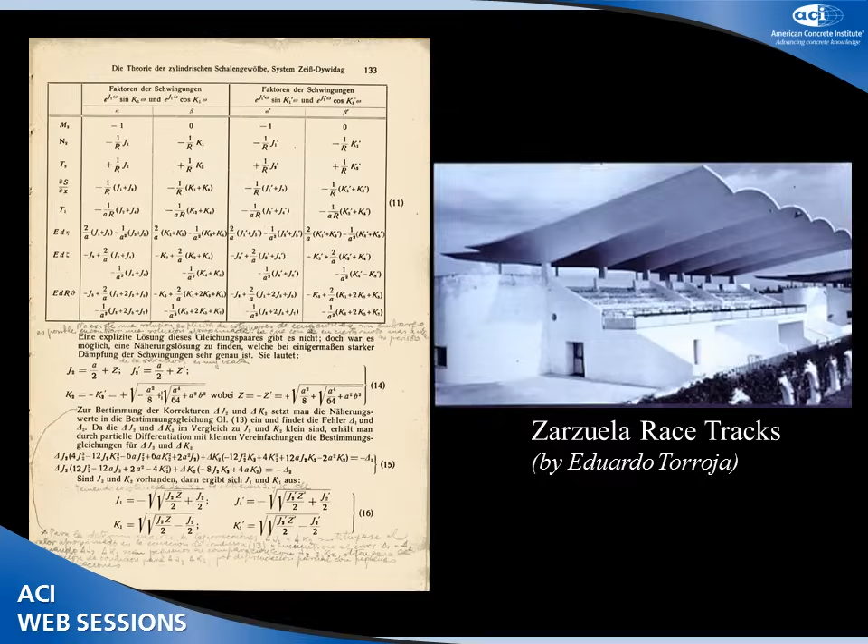Now, after he finished his studies, this is the 1930s in Madrid, the Civil War broke out, and he ended up fighting in the war, went to a concentration camp, and in 1939 he was exiled to Mexico. And it's in Mexico that we see his important works be built. It would be 10 years after arriving in Mexico that he would start experimenting with shells. And he would go back to this passion that he had about shells.

So now he had a little bit of money, he'd purchase the publication. So here we see in Candela's own handwriting in the notes, he's studying again these papers that he had in Spain written by hand. But he's also understanding that to become a shell builder, you can't just stop with knowing the theory. You have to practice it and understand the practical limitations of shell construction. So on the right, in 1949, we see his first shell construction of funicular form. And in 1950, he starts his own company, a company that would be dedicated to the construction of shells.

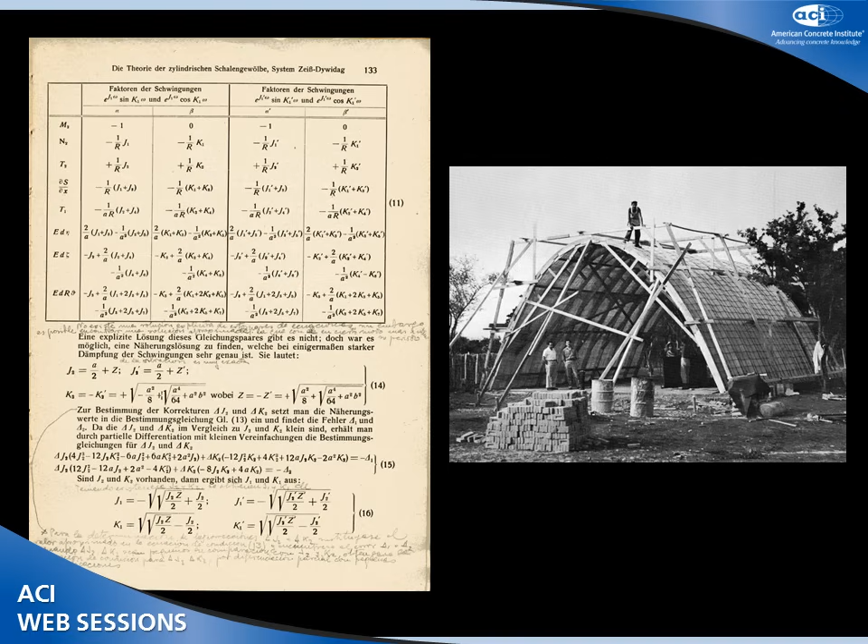Now, at first, he started with traditional shell forms, the single curvature, cylindrical barrel-type structures. But the geometric form that will become synonymous with Candela's name is the hyperbolic paraboloid, abbreviated HYPAR. So for the HYPAR, we have a double curvature surface. Double curvature has a tremendously greater amount of stiffness than single curvature. So we see that the curvature comes in two directions like a saddle, and it can be generated with straight lines in two directions. So this is a huge advantage for construction because no longer did he need to use curved pieces of wood for the formwork of his shells.

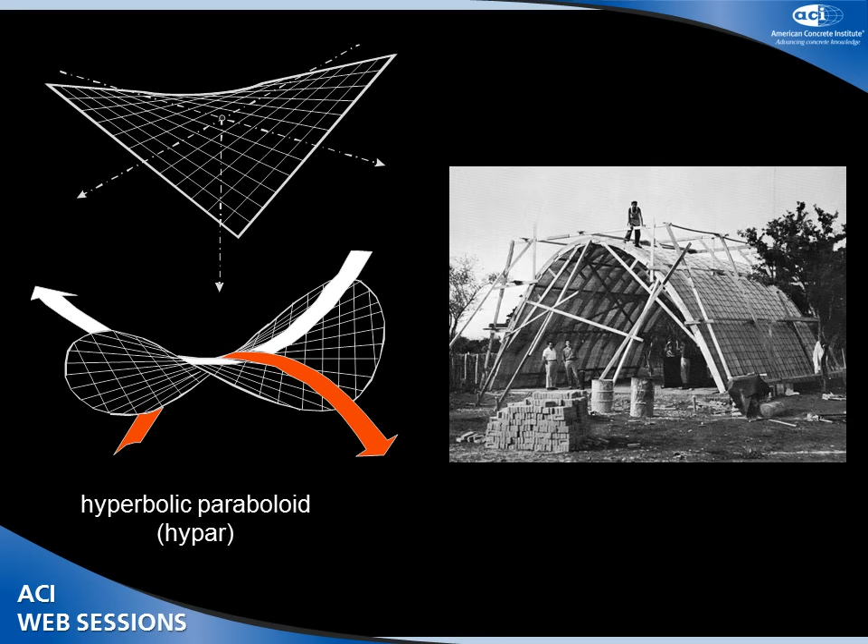His first hyperbolic shell was the Cosmic Rays Laboratory at the University of Mexico City, UNAM. And for this project, the project director invited Candela to be the builder, the contractor. And already there was a project architect involved. And the architect asked Candela to build a single curvature wagon-like structure. And Candela went to the architect and said that he would instead like to build double curvature shells, two saddles back to back. And there were several reasons for this.

One is that the shell at the very top could only be 5/8 of an inch thick, 5/8 because it needed to be able to measure the cosmic rays inside the laboratory. And Candela knew that the shell therefore needed that double curvature for that stiffness. As the shell goes down, it thickens to 1.5 inches. So all of Candela's shells are actually 1.5 inches thick. That's the dimension that Candela used to build his shells, and you can see that extreme thinness on the edge.

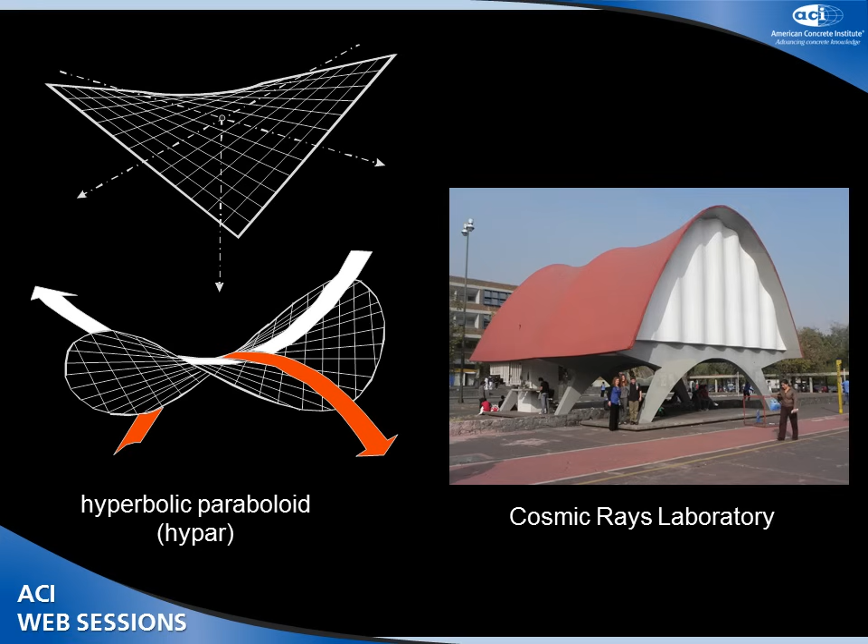He also took the ideas of the architect, modified the supports, again, another kind of aesthetic touch to the design, and also changed the screen. He corrugated the screen because Candela liked the way that the shadows played on that surface. So here's an example, and you'll see many more, of where there's an architect involved. Candela's hired as the builder, but the builder who makes the engineering calculations, he takes a general idea, which typically comes from an architect or somewhere else, and he modifies it to create his own art.

Here we see that shell under construction where indeed we can see the straight lines, the straight wood that's used to generate this double curvature surface. Again, a geometric property of the HYPAR.

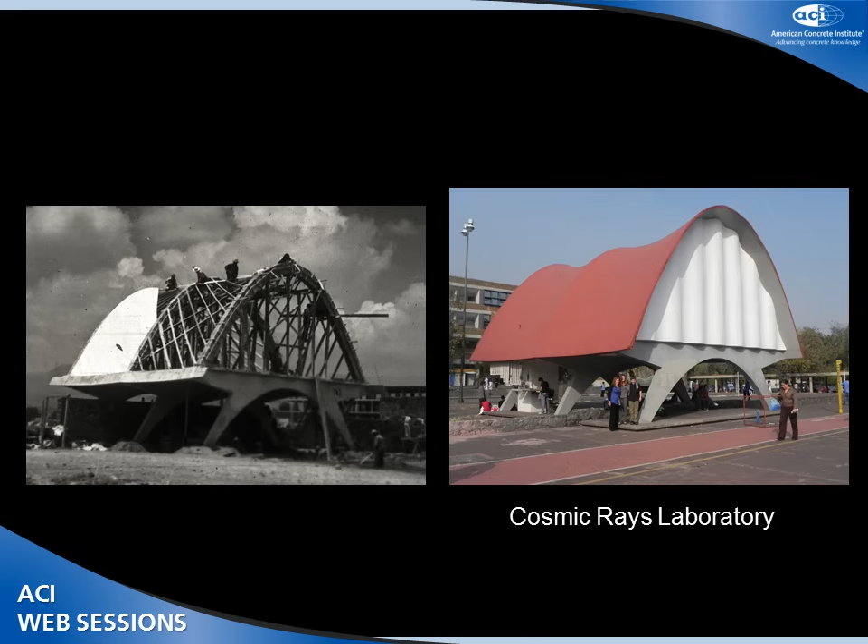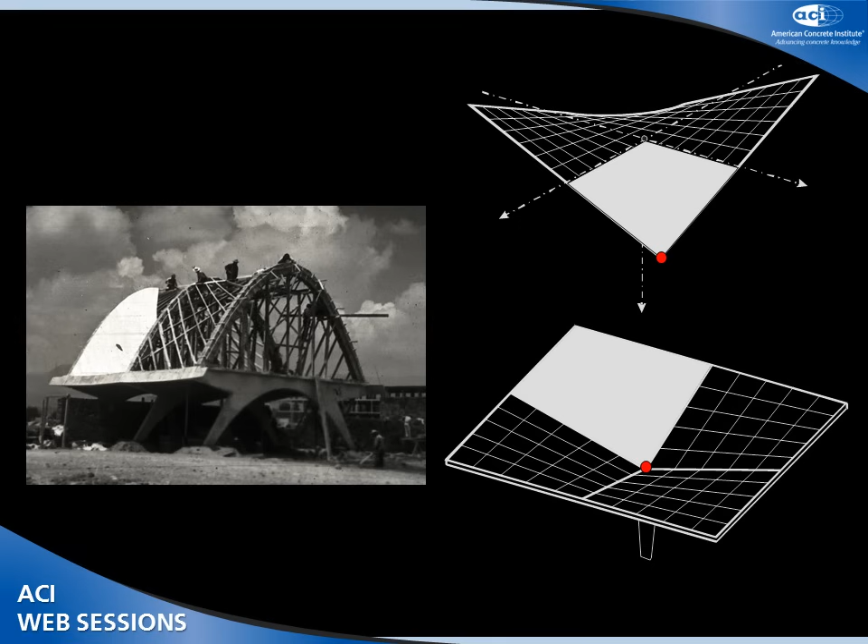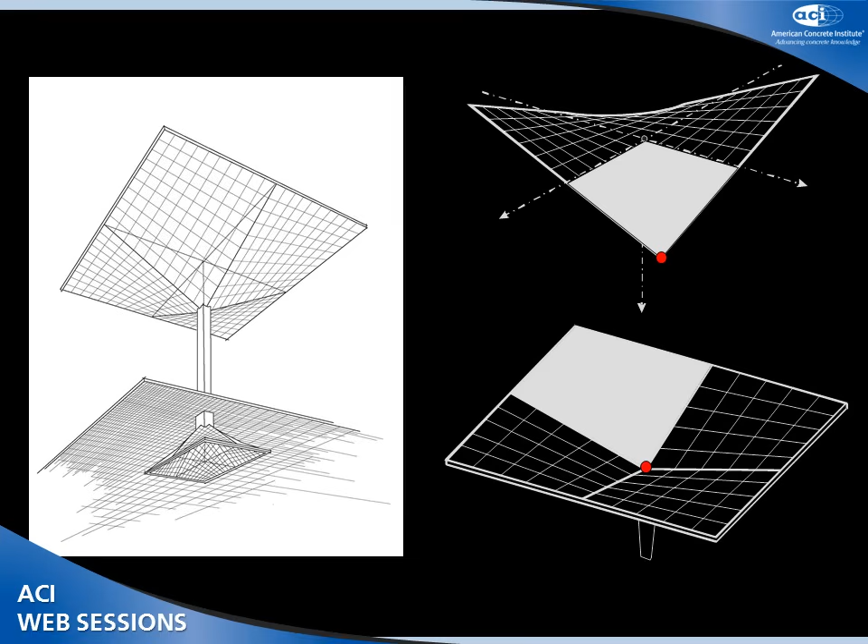Now for his company, what we call the bread and butter structure are the umbrella forms, where we see the HYPAR shell up here. If we take 1/4 of that, you have this red dot here, copy it over 3 more times, we get this inverted umbrella structure. And we saw an example of umbrellas at lunch by Nervi. This is Candela's umbrella. And here's a sketch, a rendering made by Candela where we see that even the foundations below ground are umbrella forms, all HYPAR surfaces. And the idea here again came from somewhere else. So he saw this paper in 1936 written by a Frenchman named Aimond.

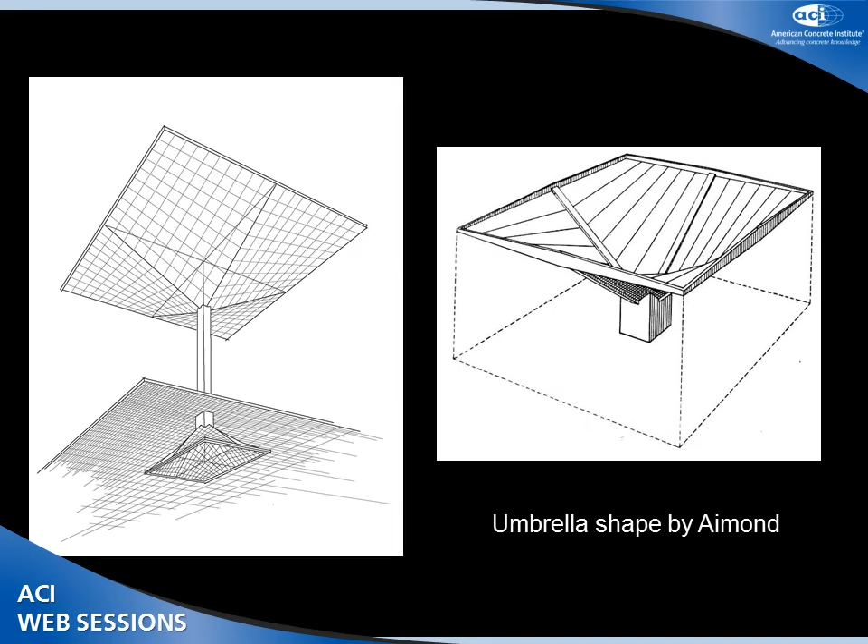So again, the idea where he's taking an idea or a form from somewhere else and making his own art with that form. By placing many of these side to side, you get a large roof covering. So there were many warehouses and markets that were designed in Mexico. If you go to Mexico City, you're almost likely to run into one of these umbrella forms. And by tilting that umbrella, there's a light well in here that allows light to enter this huge covered space.

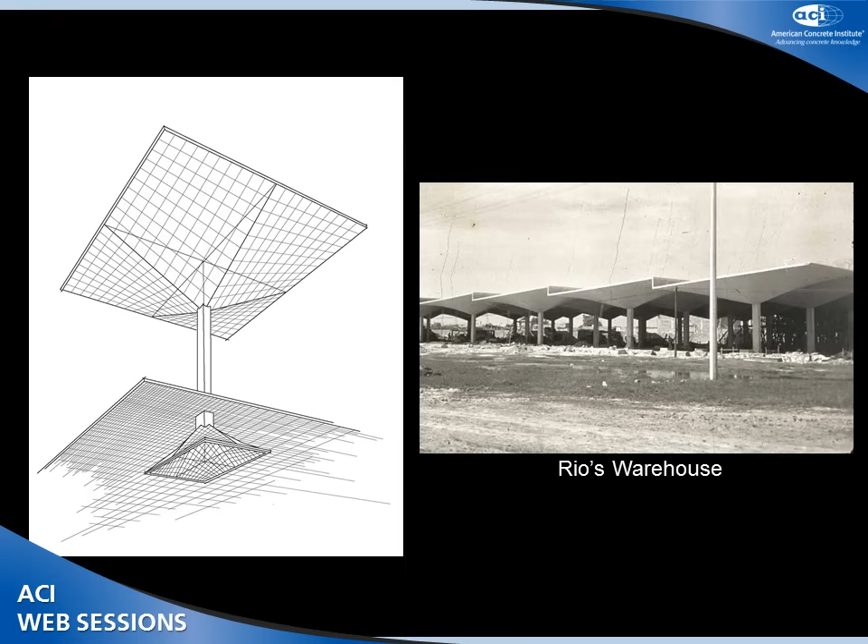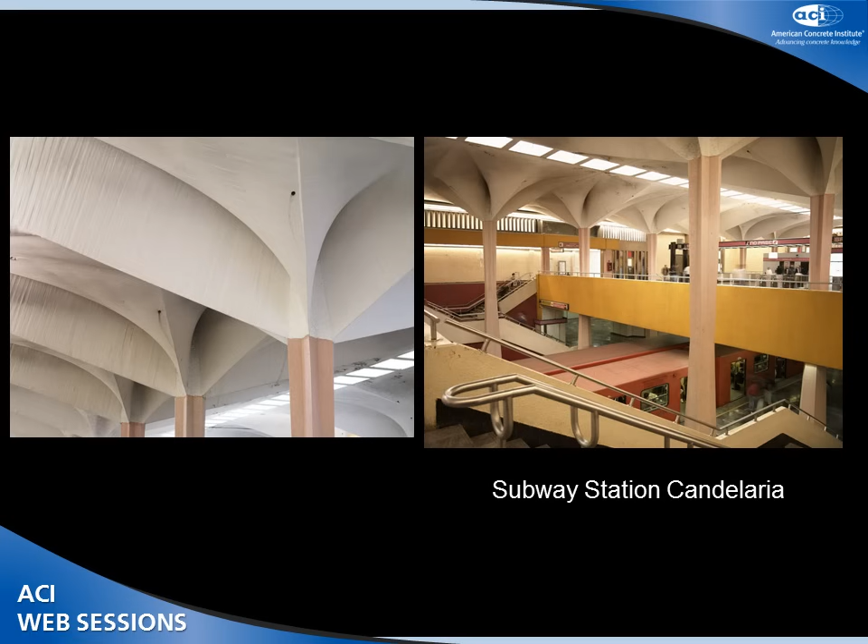This is actually just for a subway station, but you see even for a subway station, he doesn't compromise the elegance of his designs. And here's a closer view where if you look closely, you see the lines here indicating that he's using straight pieces of wood, again, that hypar surface, to form this concrete.

And the biggest play of the umbrella is actually for this church, Our Lady of the Miraculous Medal Church. I call it Milagrosa. Milagrosa means miraculous in Spanish. And if you look at it, and if I didn't tell you, or if you didn't study Candela, I bet you wouldn't see the umbrella form in there.

So the way that Candela explains how the form is derived is you take a symmetric umbrella, shown on the left, and then you tip it so that this surface here is now touching the ground over there. And you take the center point here, lift it, you place another one back to back, and here you see on the right that image of that one bay of that church. So here is a tremendous play of this form, of the umbrella form.

And one thing that we say about these structural artists, Candela and Maillart and Nervi, is that they are disciplined by efficiency and economy, and they play with the elegance. So there's many solutions to an engineering problem, so you just modify and you play with it to achieve that elegance. And that was really his ethos for how he approached his designs.

So this structure here, again, he was hired as the builder. There was an architect that was hired for this design. The architect had in mind a hangar-like structure, just a cylindrical, one single curvature, like an airplane hangar structure. Candela again went to the architect and said, I'd rather not build what you've shown me, I'd rather build this. He had in mind this, and he'd been itching to design something similar to this.

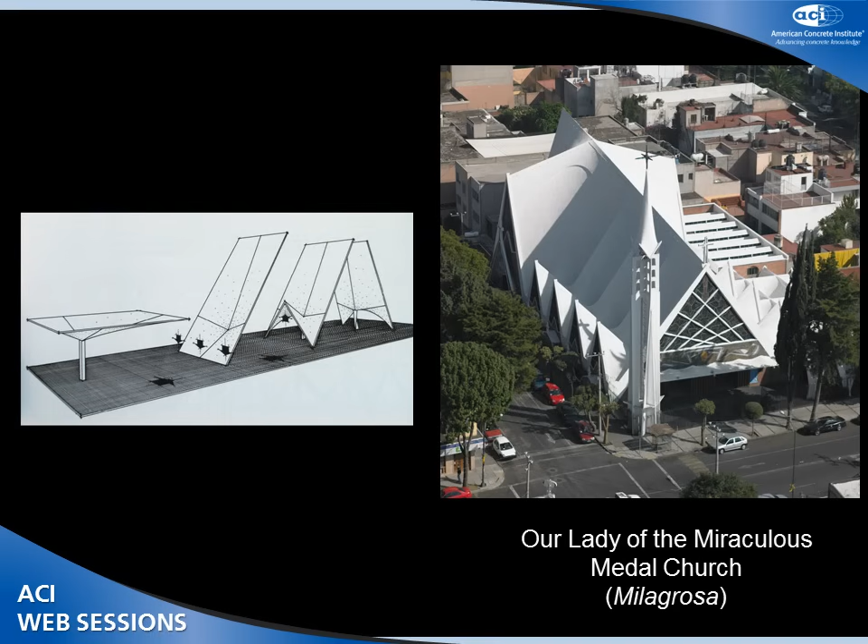But this time the architect said no, but Candela is quite a persistent person as far as I can read, and he went right to the monks and convinced the monks to just build this instead of the architect's design. So again, being part of a project, but not the project architect. He was the project builder, but the builder who was making the calculations.

And also in all of his umbrella structures, he has drain pipes that run through the columns there, because if you look at the top, you imagine that the rain would fall and capture a lot of that water. So in some designs, the water runs through this pipe and it goes to a cistern where that water can then be used for irrigation.

I'm showing this aerial view, and you can see this from the ground too, this thickening up here of the ridge. So as I said, his shells are 4 centimeters or 1.5 inches thick. At the top in this structure, there's a sculptured pattern increased to 14 centimeters. And you can see this from the ground as well as you walk. And if you're walking around the church and you see this, or even the aerial view, you see it's a very nice aesthetic touch to the structure.

Imagine it plain. It would still look beautiful, but maybe not as elegant. There's this nice aesthetic detail. But it's not an aesthetic detail first. It's an aesthetic detail second. The first reason for that is an engineering reason. This was in the 1950s, the mid-1950s.

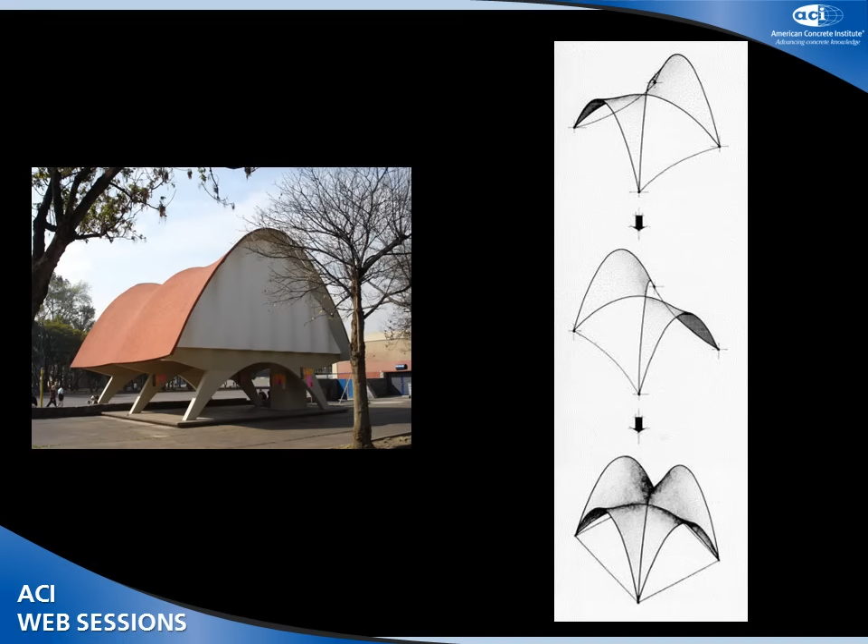And the way that it works is really that the shell carries all of its load down to the valley or the groin, this area here. So all of the loads in the shell move down into this valley here, which is stiffened. So in that valley, he's thickening the concrete from 4 centimeters to 12, and there's a large amount of concrete in here where he's placing a lot of steel because it's really acting like a 3-hinged arch, those groin valleys, and he's understanding this. And by making it stiffer, it's attracting the forces.

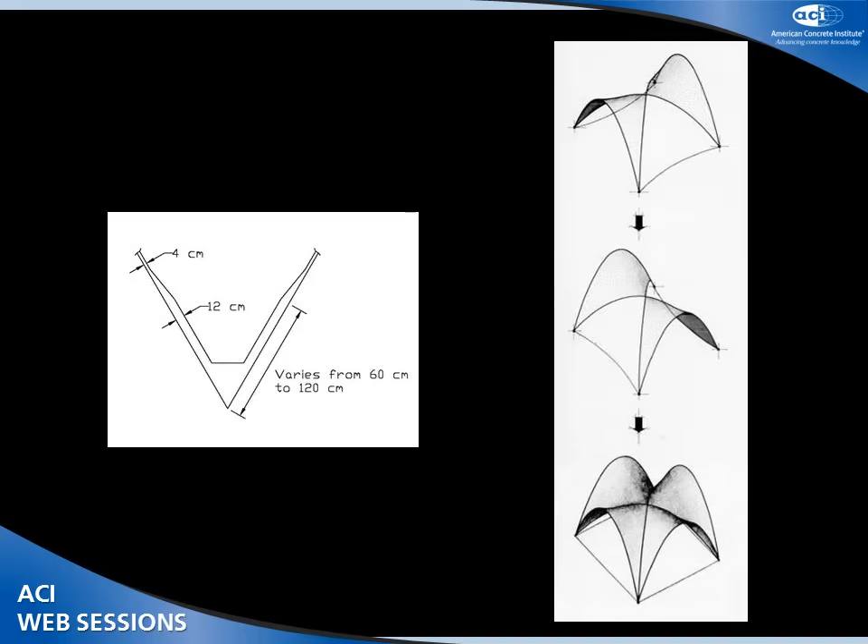For restaurant Los Manantiales in Xochimilco, this is one of his masterpieces and actually one of his self-identified favorites. He's taking not 2 saddles and intersecting them, but he's taking 4. So to understand how this shape is derived, because I struggled with this when I started studying Candela, I'm looking at Los Manantiales and I'm saying, how in the world is that formed with straight lines? All you see is curves everywhere you look.

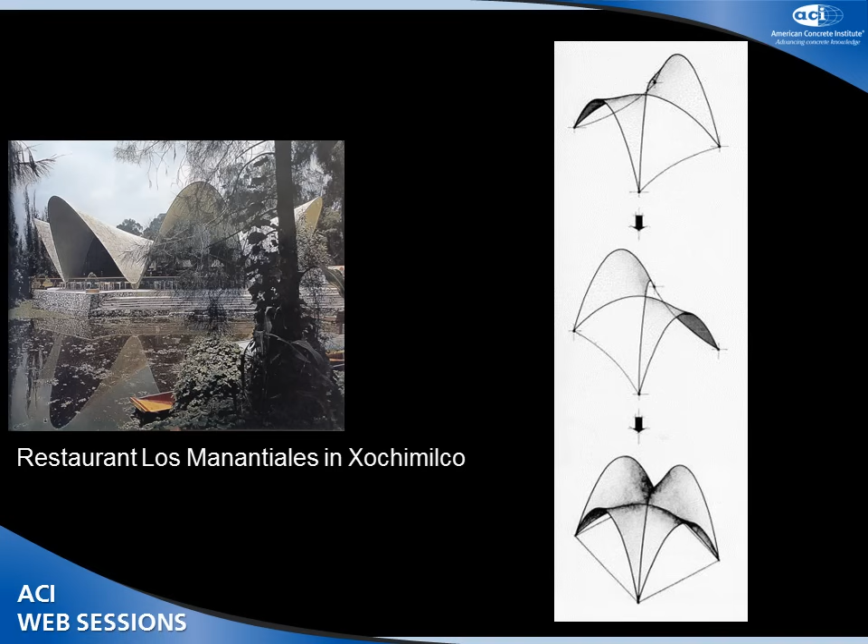So the best way to explain it is actually through an animation. And a few years ago, some graduate students made this animation where you start with a hyperbolic paraboloid sheet. All right, so this is a warped surface, and the straight line generators, in this case, are at 60 degrees to one another. So here we start off with one hypar sheet, and we're going to start cutting away at it.

All right, so we cut that part out. And now what we're starting to see is two petals. This is what I call a petal here, two petals. And by cutting the edge here, what we see now are the parabolic edges. So you're starting to see this parabola here. That's this parabola there. And then you copy it over 3 more times, and you get the surface that you see for the shell on the left.

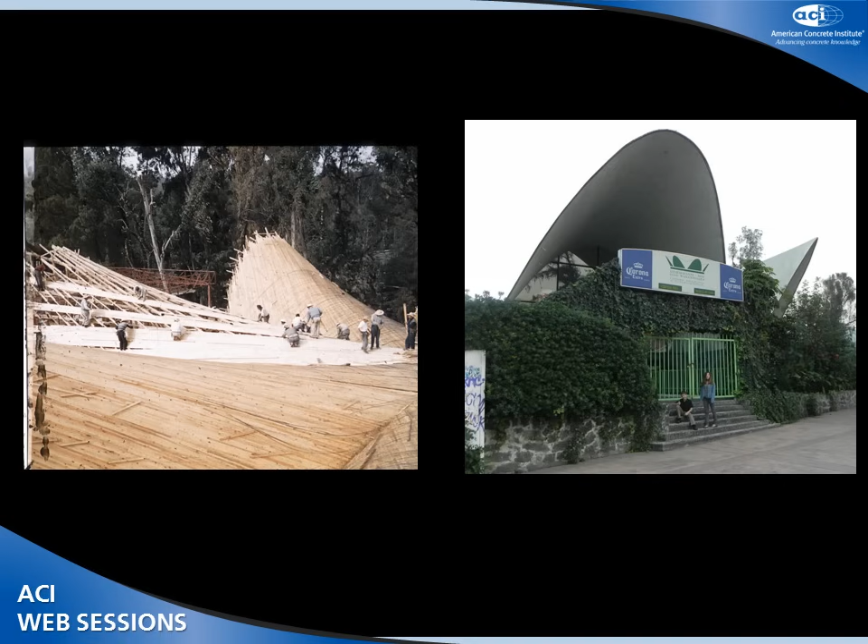This is a construction image where, again, you see that indeed he's using straight pieces of wood to make that formwork for the structure. So he has straight line generators in two directions, 60 degrees to one another. And here you see they're starting to lay out the steel. So he has 2 directions of steel, 3/8-inch steel bars also in the shell. Of course, for concrete, you need that for temperature and shrinkage and other effects of concrete.

From the roof, you'll see patches of red, and that's because they used to have red waterproofing on it, and then it had white waterproofing. So you'll see some of this patching going on, but I've climbed all over the roof, and the roof is in excellent condition. Same with the inside. You look on the inside, I would say with relatively little maintenance. His Candela structures, I've visited several of them, are in good shape.

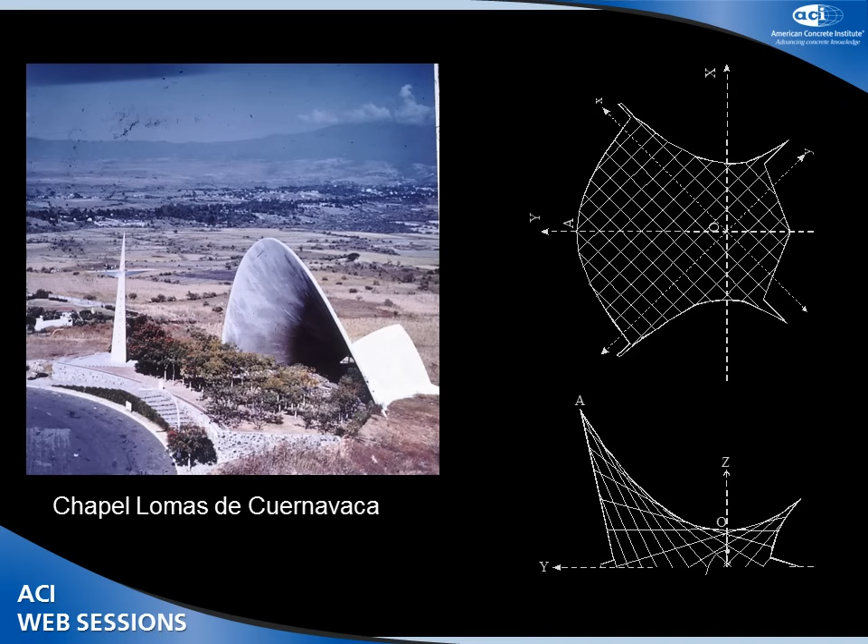5 minutes? Okay. And again, you see the imprint of the formwork. Chapel Lomas de Cuernavaca, 1 single stretch saddle. Again, the straight line generators are evident. And if you look here at the lines, again, you see that imprint of the form, how this was built and constructed.

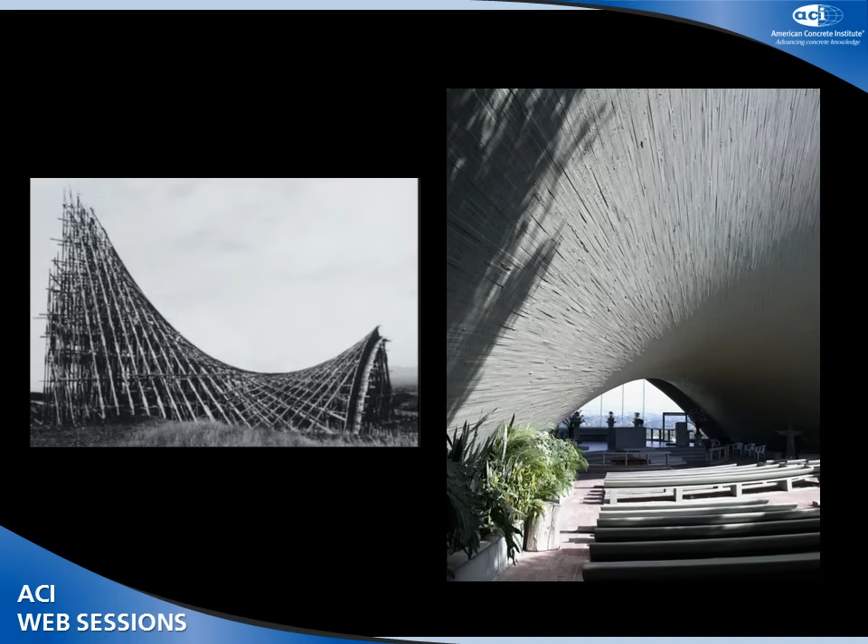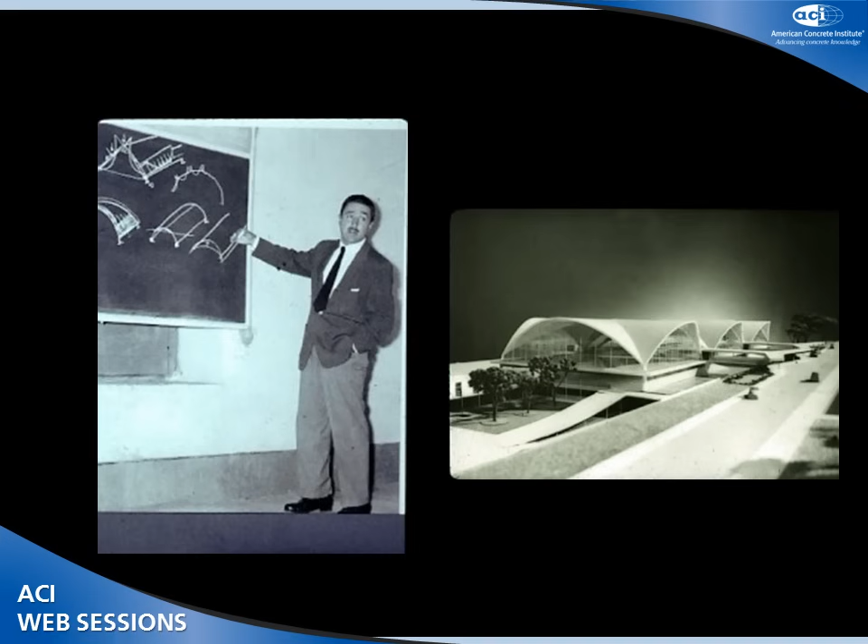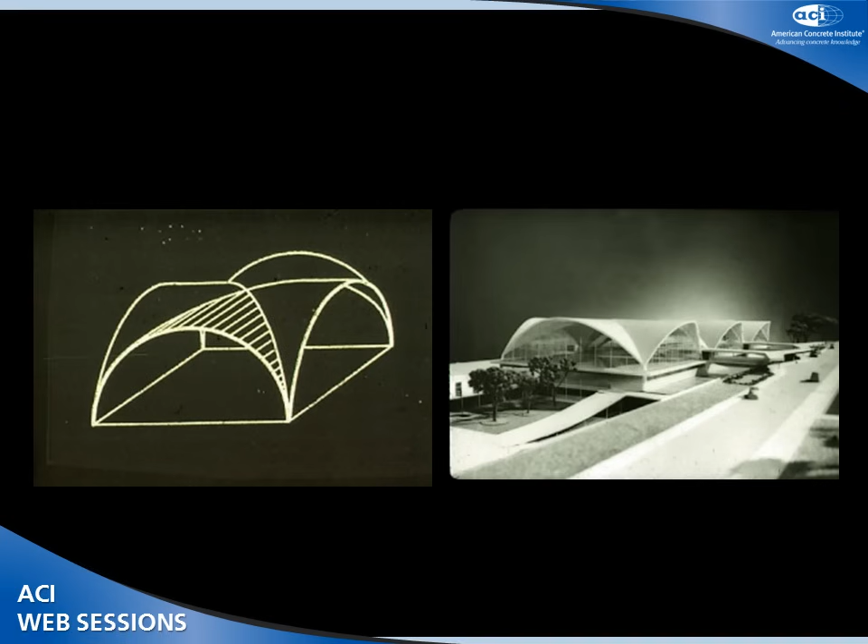All right, in 1954, Candela goes to MIT to a conference, and he learns about a collaboration between the architect, Minoru Yamasaki, and engineer Anton Tedesko for the St. Louis Airport Terminal. And this terminal, the vision of the architect was intersecting cylinders. Remember how Candela was doing intersecting hyperbolic paraboloids? Here we have intersecting cylinders, cylinders being single curvature. Recall, single curvature doesn't have as much stiffness as double curvature.

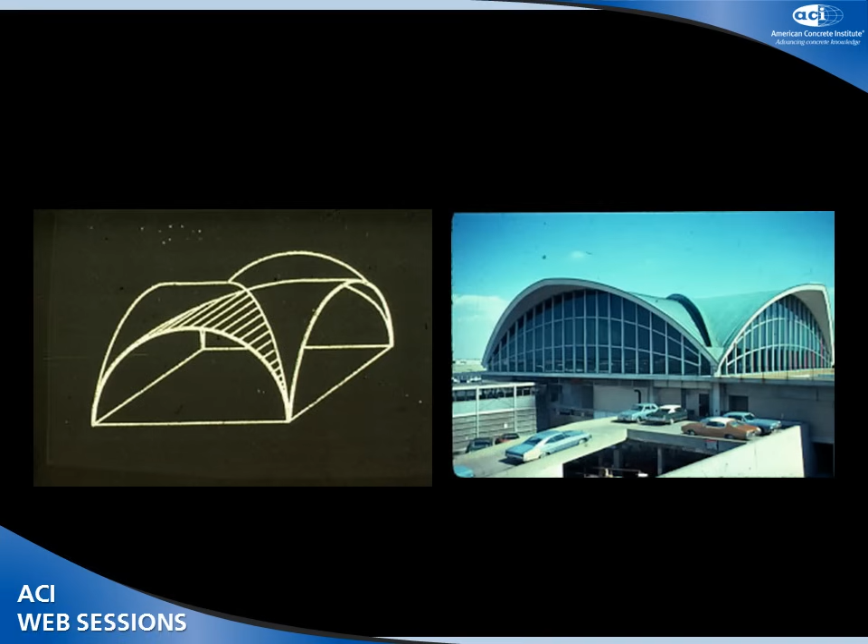Anton Tedesko told the architect, you can't build it like you want it. You have to have these stiffening ribs along the valley and on the edge. And of course, the architect didn't want this, but the engineer gave him no choice. And that is indeed how the terminal looks today. It has these stiffening ribs from the outside. It disguises now the thinness of the shell. The visual image is not anymore the architect's vision for the structure. And there was difficulty in all of that.

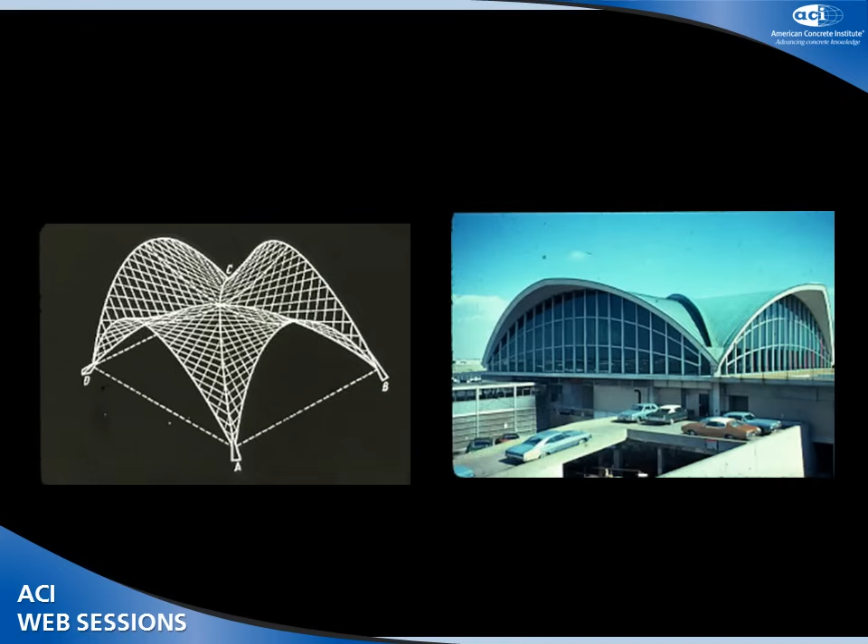And Candela knew, in listening to this, that the proper form and what would have solved a lot of the problems would have been to make them hyperbolic paraboloids instead of cylinders. So he said that the next opportunity he had in Mexico, he would design or redesign the St. Louis Airport Terminal. So here's the St. Louis Airport Terminal, and in 1960 we see Candela's critique of the airport terminal in the Bacardi rum factory. So we see it is indeed the same structure, but not cylinders anymore. Now we have hyperbolic paraboloids.

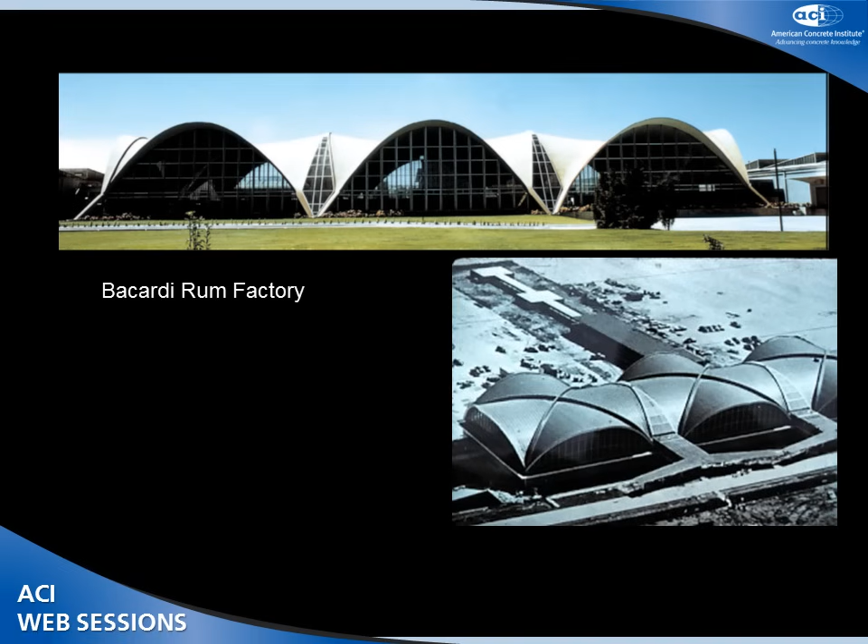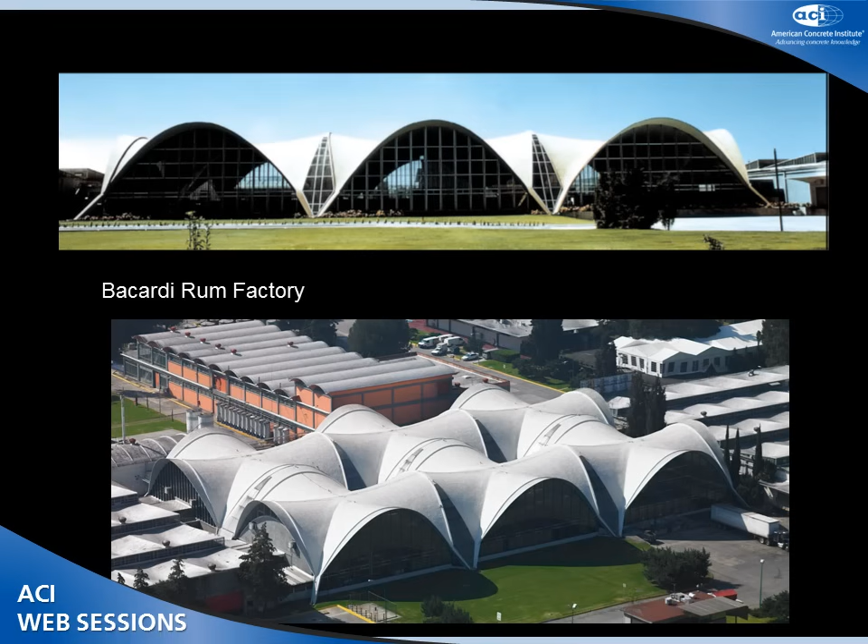But not only that, he's taken these hypar shells and lifted them up with these little feet here, 2.5 meters higher. In 1970, 3 more shells were added to the structure. The other thing, by the way, he does have stiffeners, but the stiffeners are not at the edge. He pulls them back. And the idea here is that he's able to express that thinness of the shell, one of Candela's aesthetics. And here's to give you a sense of scale, 2.5 meters, he's lifting these vaults up higher.

From the inside, on a cloudy day, you don't need any light, so it's flooded with natural light, and the people in there seem very happy to work in there, and I show an image of that to my students so they believe me that these factory workers are really enjoying working in this space. Yeah, I know, that's what they think, right?

So, all right, now I'm going to wrap it up. I introduced Felix Candela as a structural artist. The definition of a structural artist is someone who designs efficiently, so designing for minimum materials, not using more materials than necessary, but of course still having the appropriate safety factors in your design. Next, he would have a builder's mentality. So you're designing something, but you also understand how it will be built, because a lot of the economy, especially for these shell structures, comes in the construction of them.

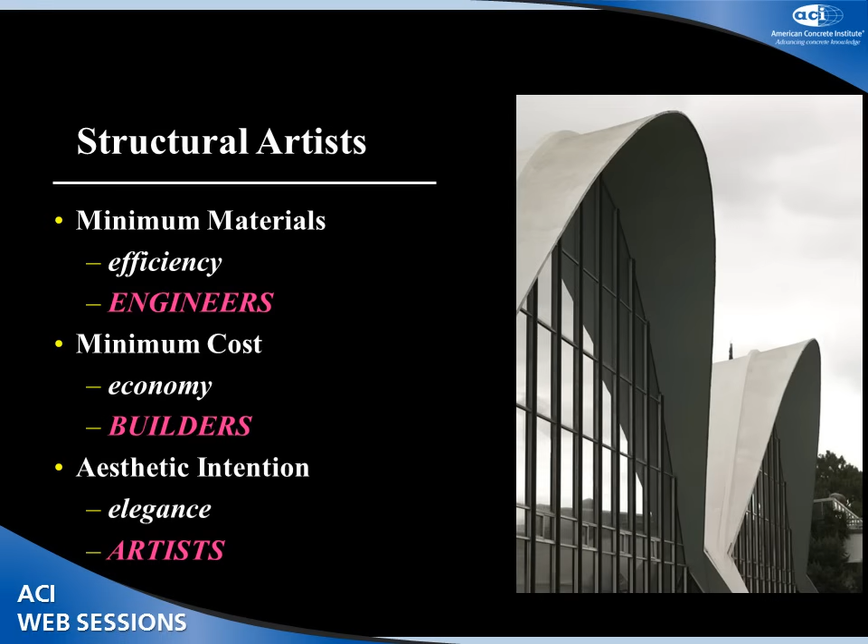And also that person will have an aesthetic intention. So there are many solutions to a design, and it should be elegant. So they are engineers, builders, and artists, as I said in the beginning, my definition of Felix Candela. And to make clear the distinction, a master builder possesses the first two attributes. A structural artist includes that idea of aesthetic intention. And what we see in the evolution of these structural artists, Felix Candela, Robert Maillart, and others, is they begin by imitating what they see and what they know. They innovate, and then they come to their final inspiration, their masterpieces.

And I'll end with one quote from Candela, which wraps up this idea of concrete as art. He says, few people realize that the only way to be an artist in this difficult specialty of building is to be your own contractor. It may be shocking to think of a contractor as an artist, but it is indeed the only way to have in your hands the whole set of tools or instruments to perform the forgotten art of building, to produce works of art. Thank you.